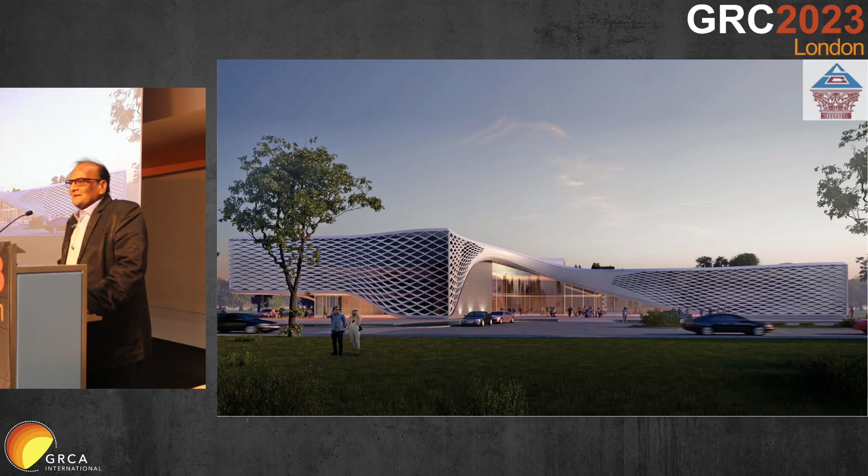Today I'm going to present a few of our intricate designs, intricate facades, which we are carrying out in India.

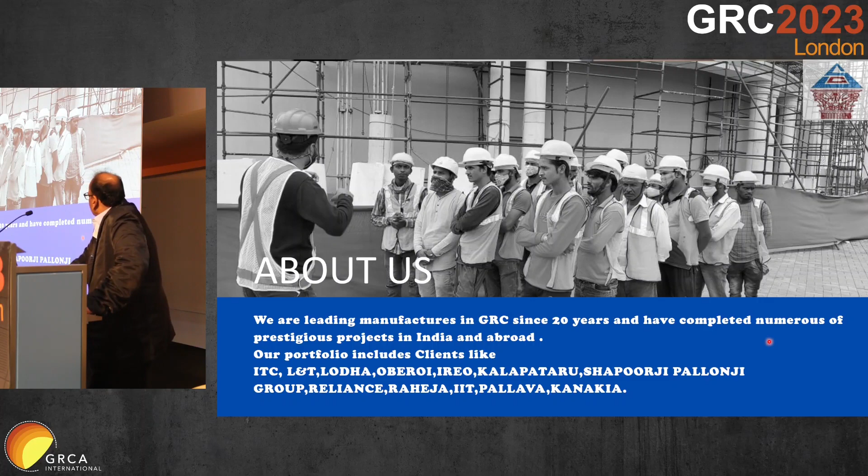Basically, this is our team's work, carried out onto the sites as well as our factory, following all sort of safety rules and regulations, which is most needed over there.

It's at the Jio World Center in Mumbai, a place called BKC, where we had lighted screens right from the first floor to the 7th floor. It has got 6 screens, width of around 5 meters, and height around 28 to 30 meters, different sizes, which has got inner coves to get the lighting inside.

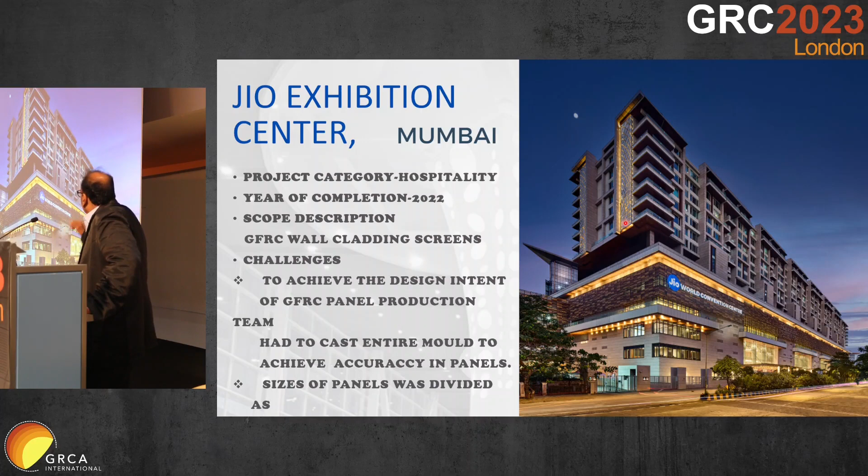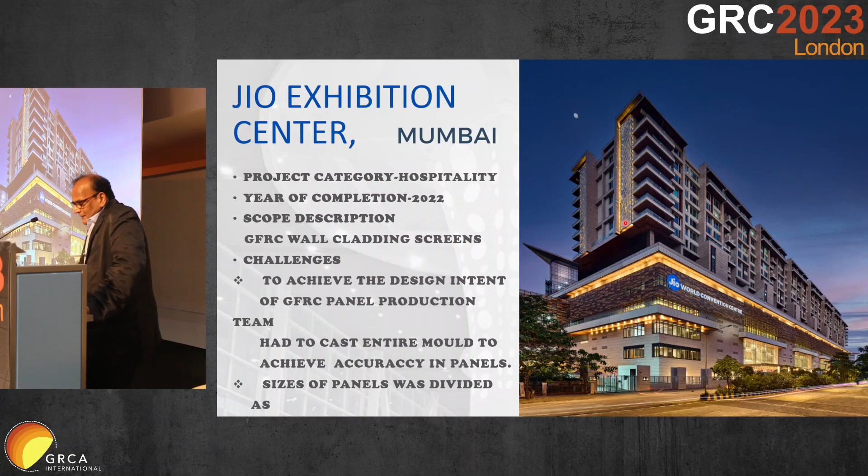So we got that done into the molds. It was very tricky and very expensive, so to avoid that, these are the details of the mold sizes, wherein all these are different shapes. If you see, these designs are going the other way around, left side and right side. So for only 6 total numbers, we had to prepare somewhat around 2 full molds over there to replicate that, and it was very expensive. The area was not that much.

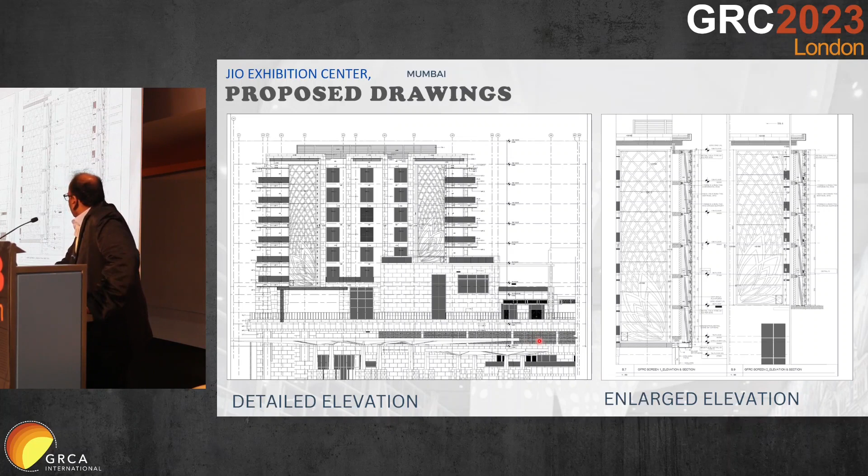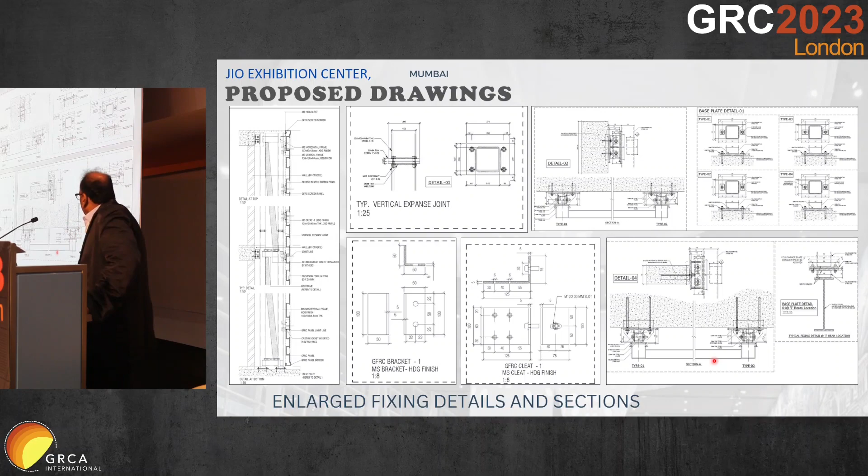These are the detail fixing, all done onto the steel framing work on top, as well as the provision for LED connections through all the design parts over there. These are kept around 1 meter away from the back wall.

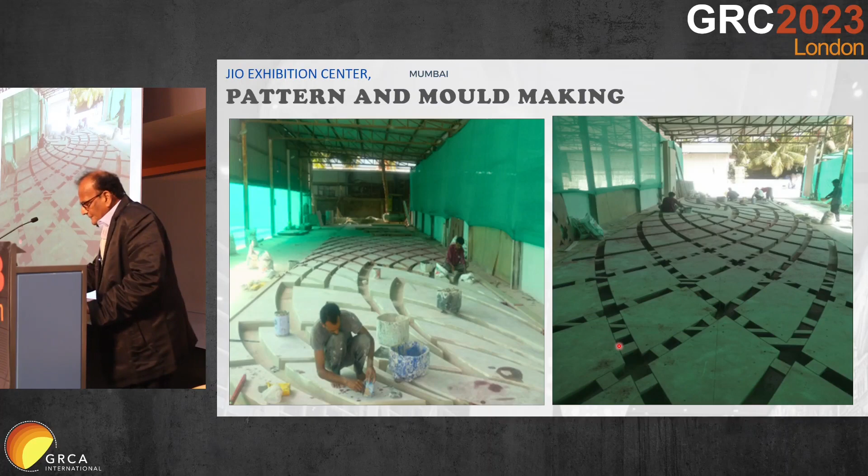This is the ultimate work that has been done. LED has been provided inside the coves over there, with individual coves. You can see the connecting lighting between the 2 lines, and these are the sizes of the designs.

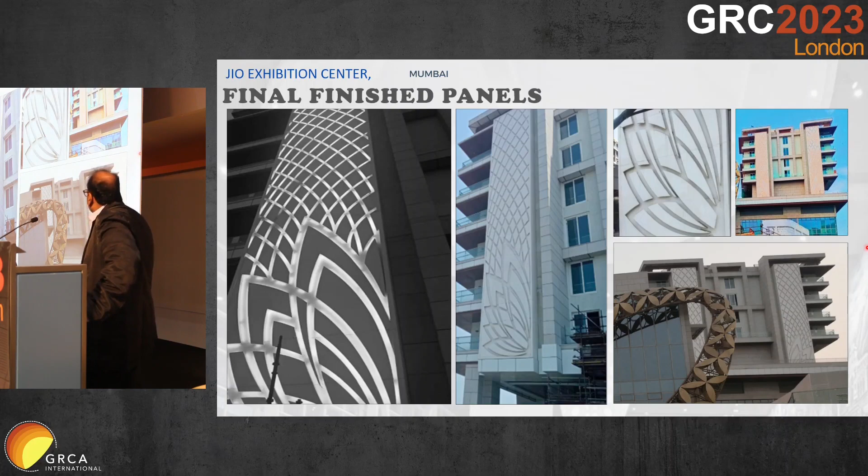This will be around daylight over there in detail. So like that, these are all the 4 elevations. There are only 6 screens, these shapes over there.

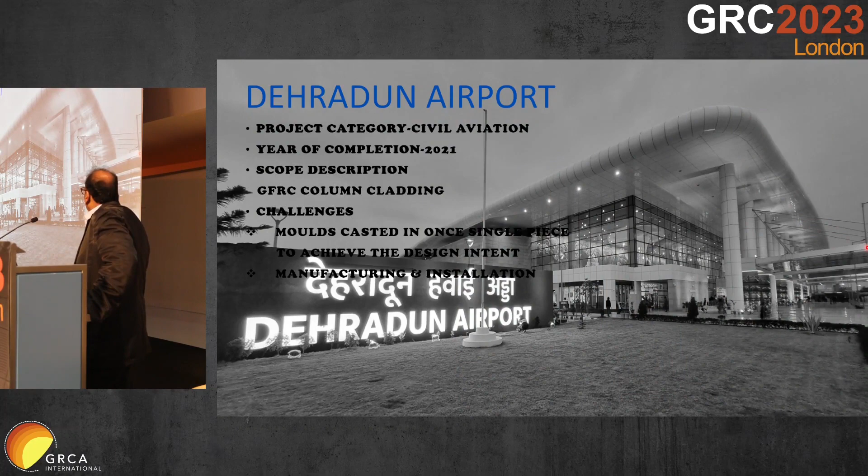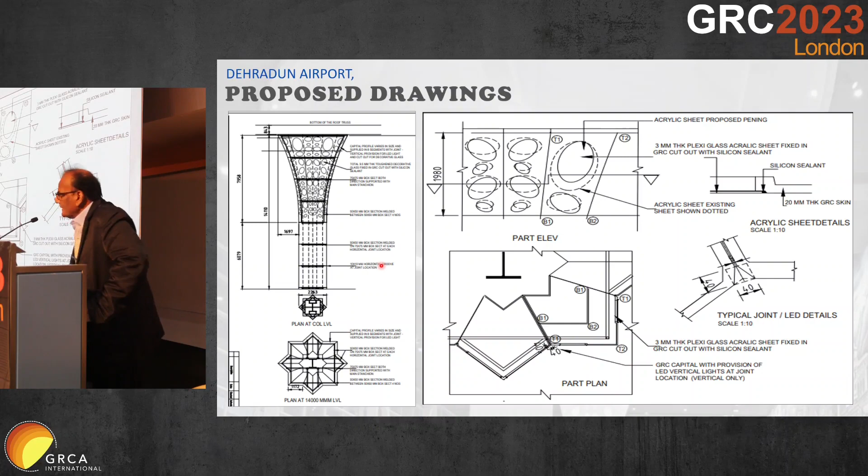And this lighting, these are the molds we had done in the part mold, which has an 8 repetition. There are around 14 columns inside, these are all the internal columns there.

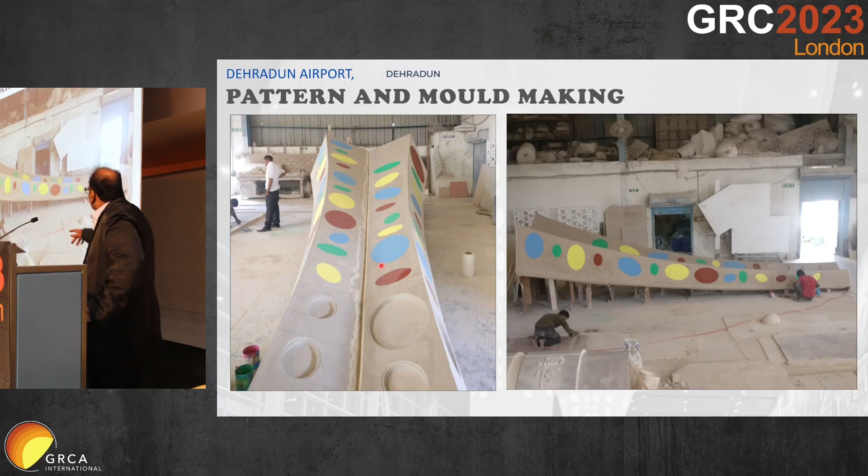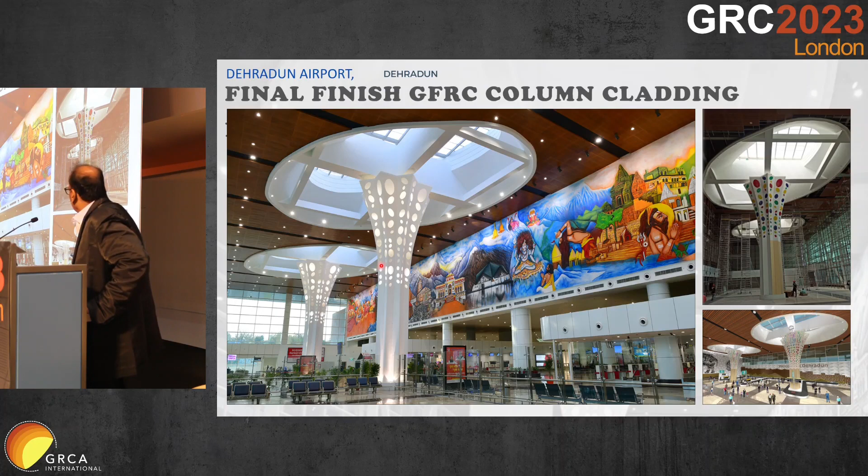These are the final photos of this finished work. The top capitals are illuminated with LEDs, as well as the bottom base, which was also illuminated. So all the hidden lighting has been done over there.

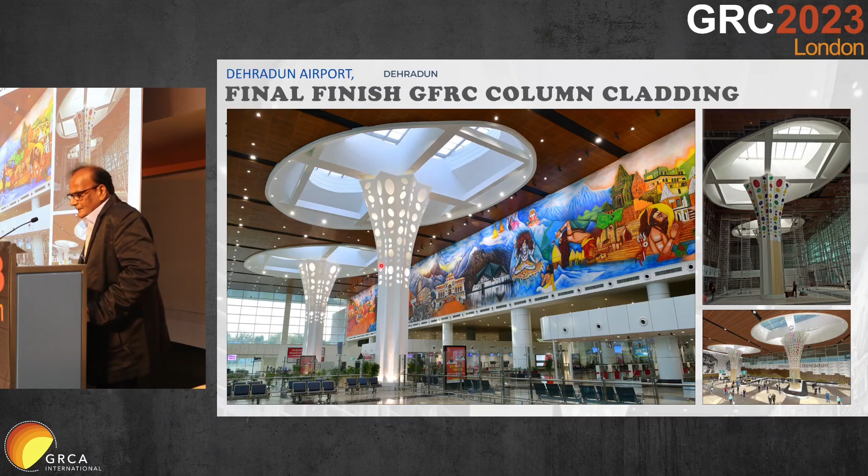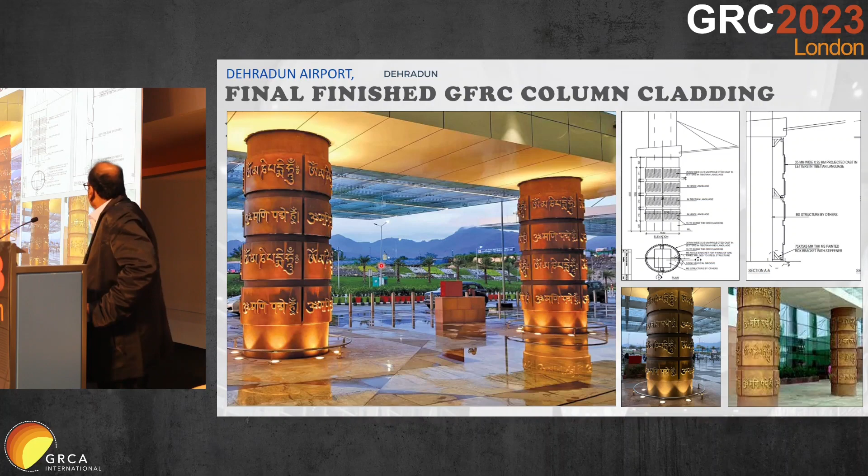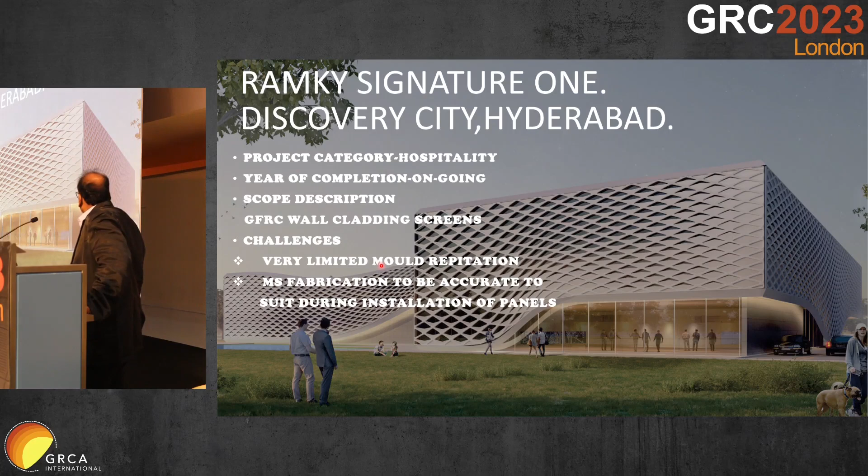There is another project ongoing at Hyderabad, for the clubhouse. It's a 3D elevation, very intricate, and very difficult to get the molds done. The work is going on.

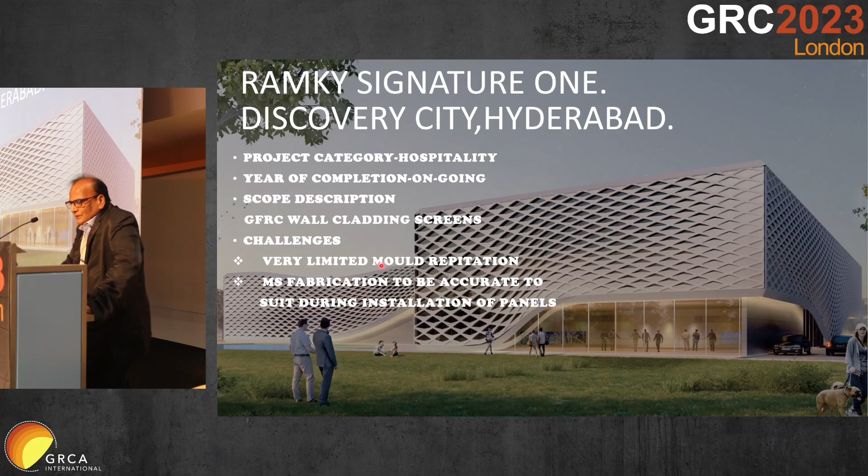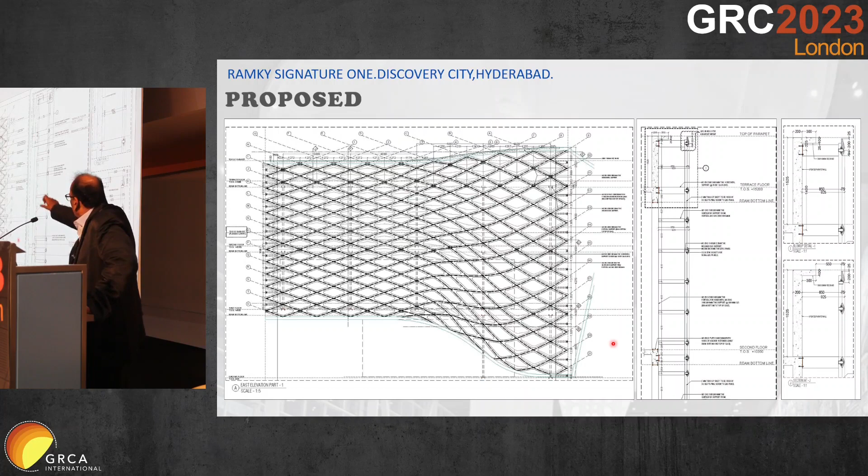These are the drawings that have been prepared. If you see these models, they are narrowing as the flow goes, and increasing as it goes down, as well as turning on the top and bottom with a curved shape.

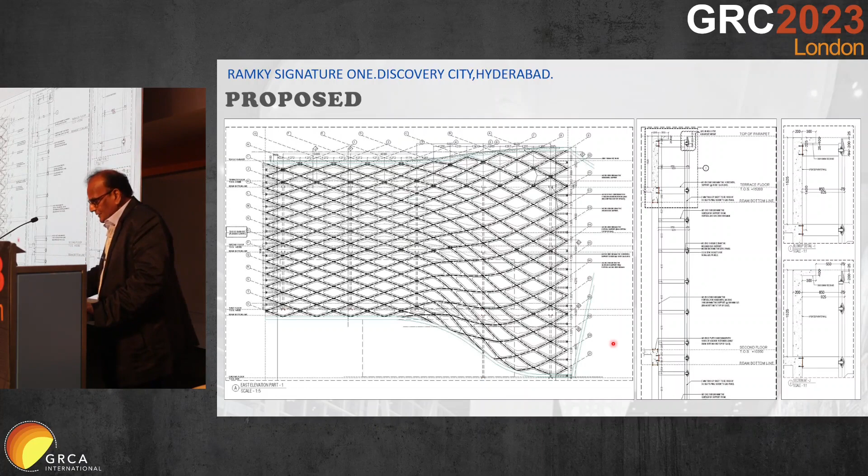These are the basic patterns, and this is one type of pattern. There were around 1,300 patterns like that, in different shapes, and these are supported with a structural framework inside, which is concealed.

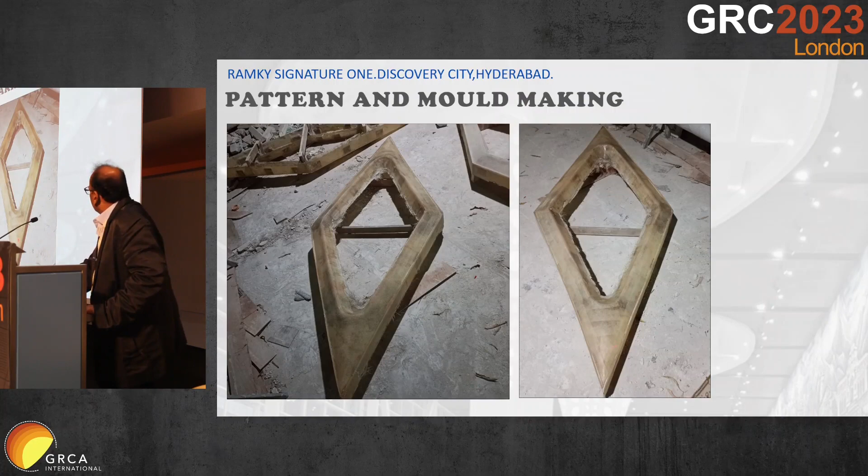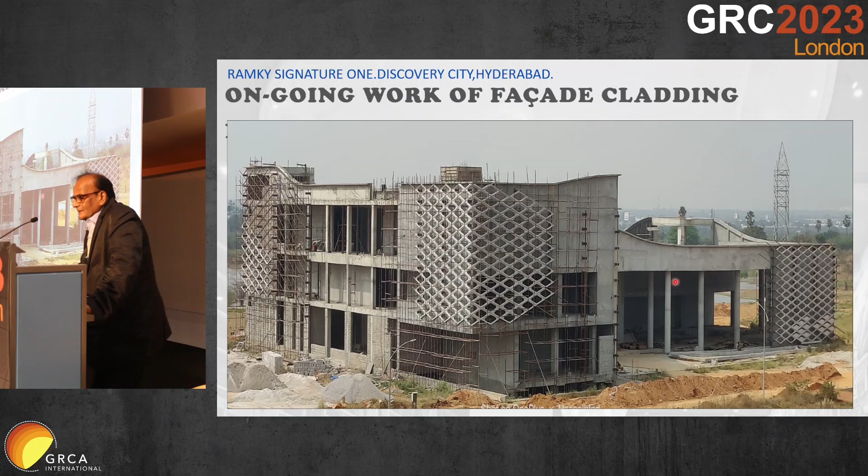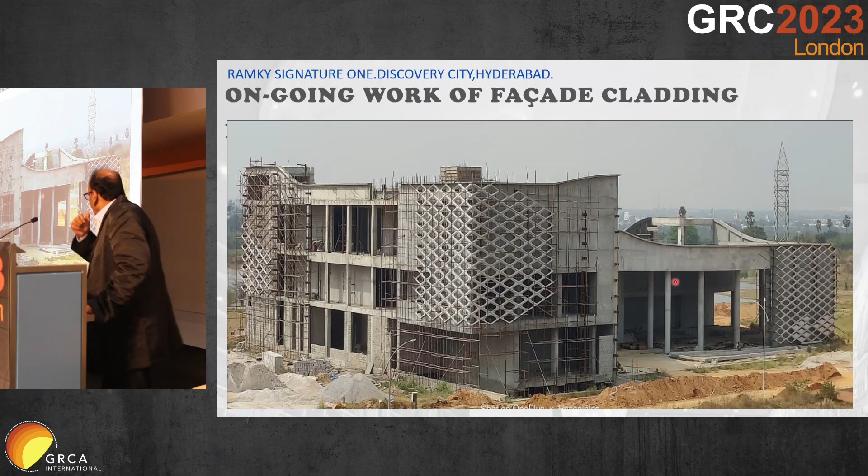These are the ongoing projects we are doing there. The screen is moving like that, and it is turning inside, going up to the ceiling part as well. This is very challenging for the designing part, because the architect and consultant were particular about the wind pressure, seismic forces, and strength. Because when it goes to the ceiling part, apart from those two forces, there is gravitational force also acting over there, so considering that, the design was done on a STAAD model.

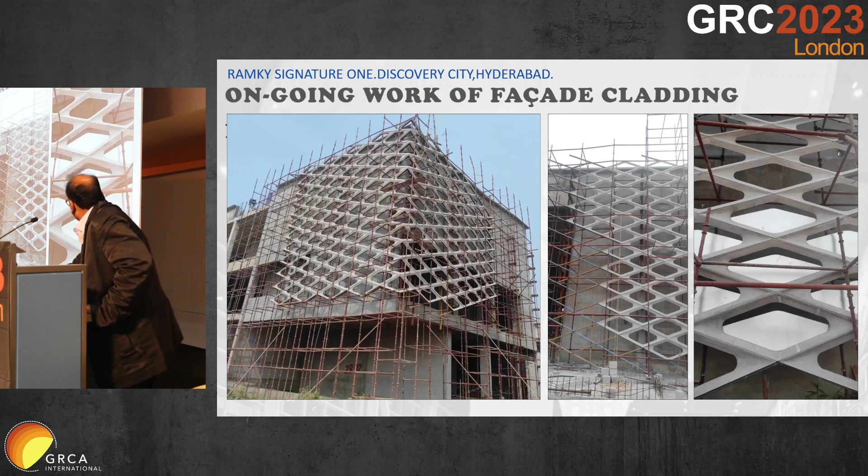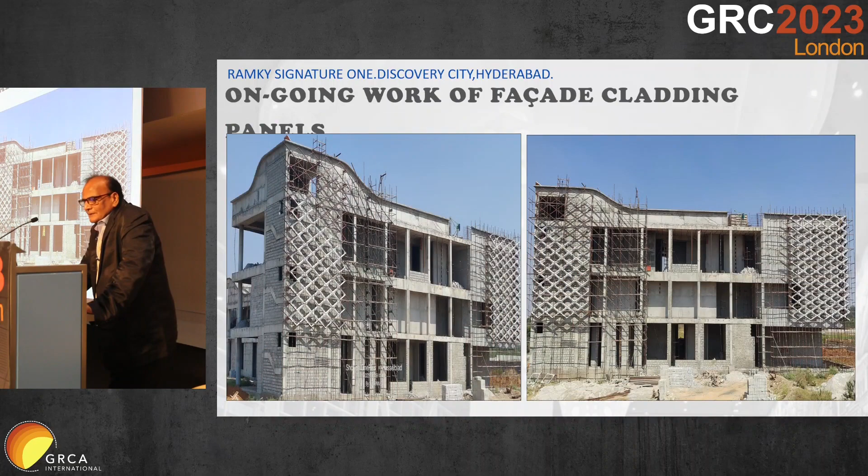This is the detailing you see at the joint line over there. Again, the corners - other two corner elevations are there.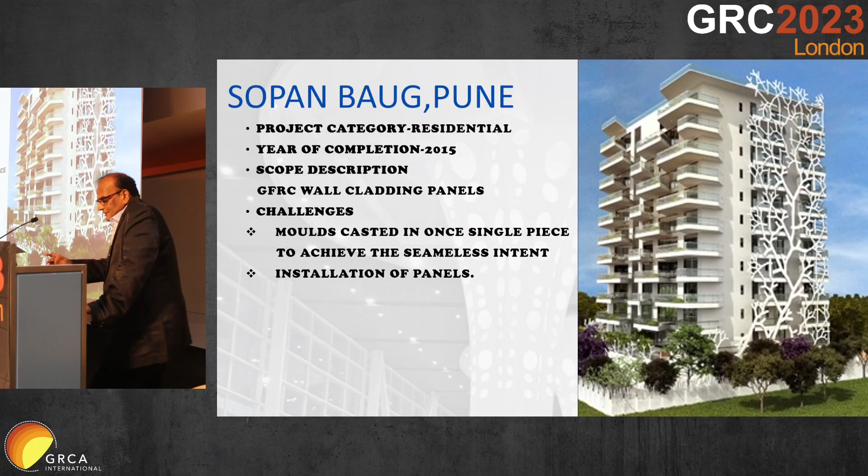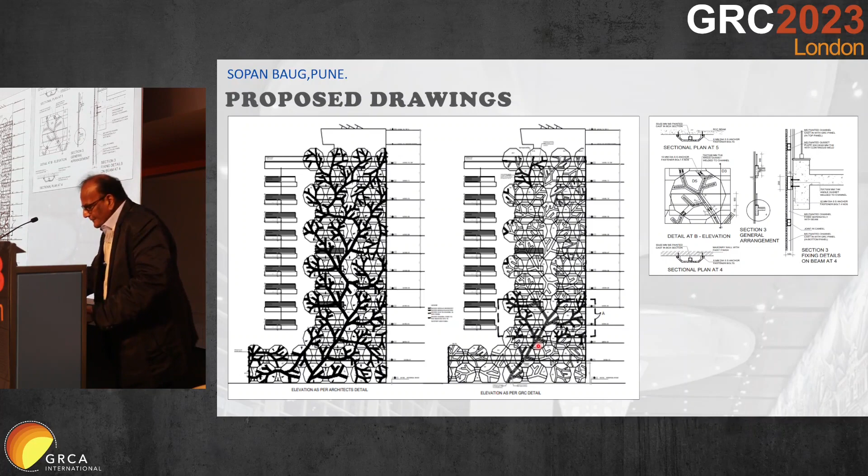This is the facade elevation, where it is branching from floor to floor, like in a balcony area. The client was a bit concerned about the strength part, because it's an open balcony, though they have got the glazing part over there. Still he was not comfortable about how it would sustain.

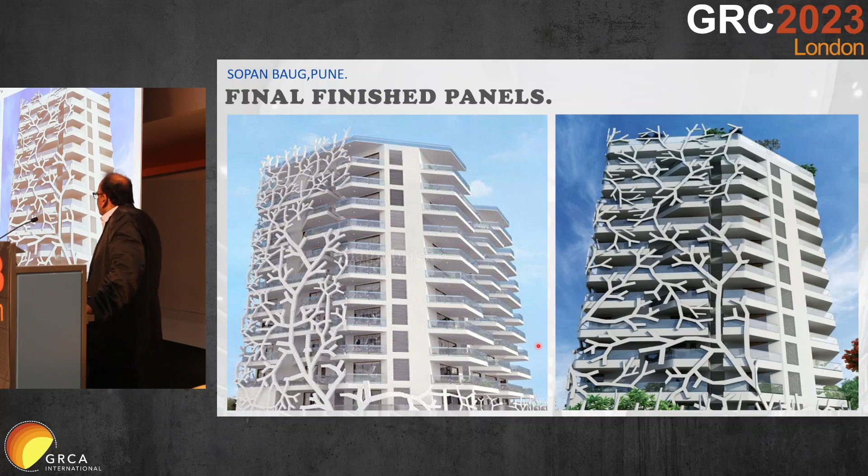So we had done the impact test on site after installation, as per the drop testing method, which is around 15 kg and 30 kg at a distance of 1 meter and 1.5 meter, from a height of around 1 and 1.2 meters. We did the testing at a few balconies and we passed there.

This is that elevation, where you can see the fins, which are the branches spanning between the balcony's open area.

Now one ongoing project is the data center at Chennai, where the architect had the concept of a parametric facade, where you can see the facade with blank patterns moving in a certain pattern. There are generator stations and this is the data center itself. These patterns go from the front elevation to the side elevation with a certain flow.

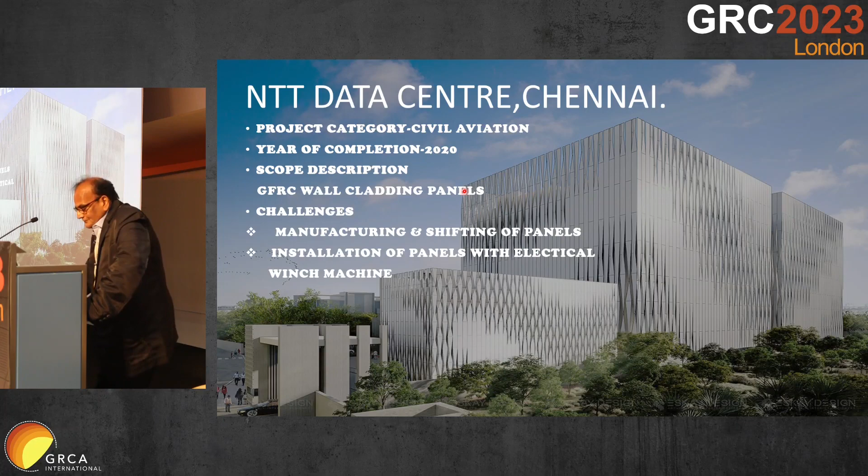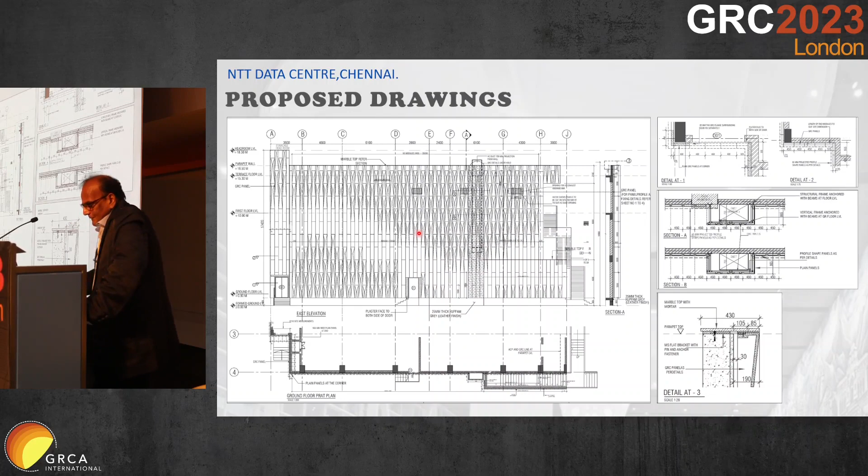These are the individual elevations. We numbered certain similar types of patterns, and according to that, the location has been provided at certain places to create that flow of the GRC.

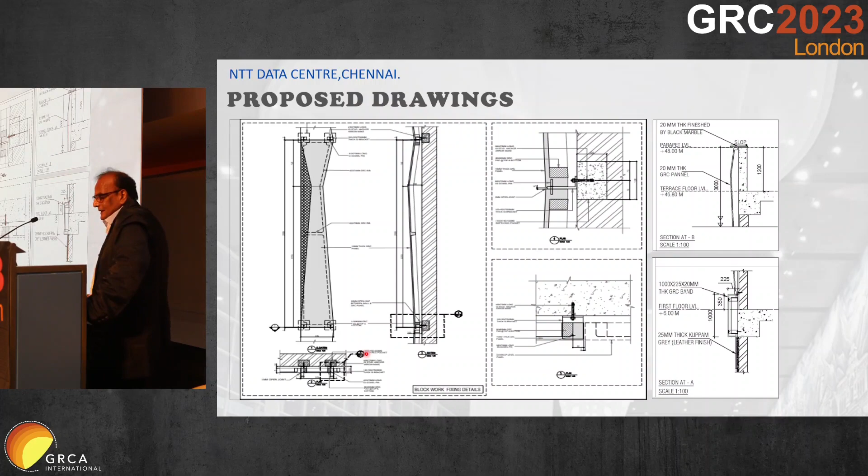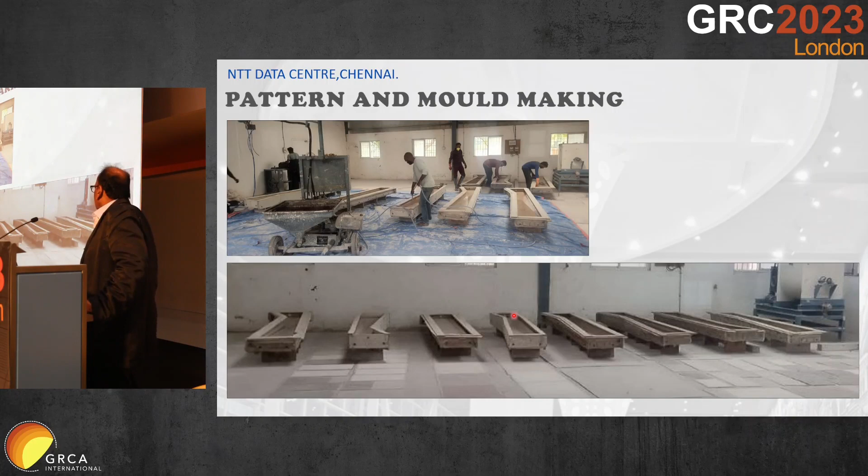These are the molds which we made on site. We had a mini plant at Chennai so the work could be done faster, because it had to be completed within 3 months. We started in February, and by June mid we should be able to complete it.

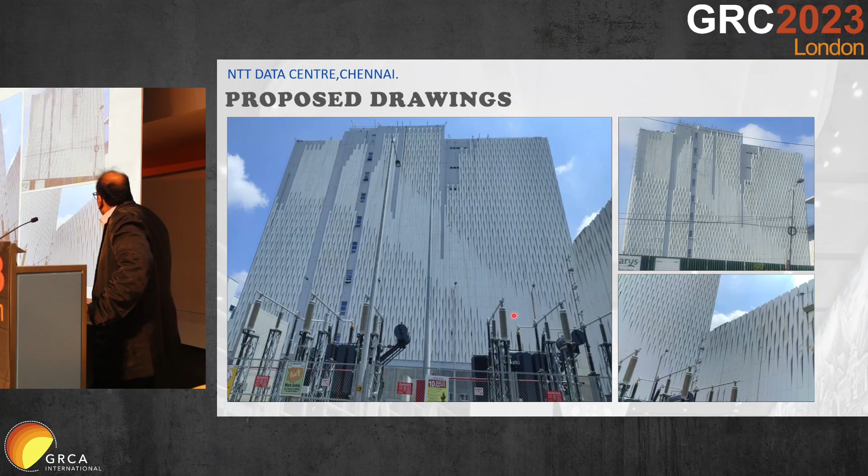This photo was taken one month back while I was preparing the presentation. Now this elevation has been done. This part and the window parts were kept open, but now it has been closed. All these elevations look really great, and the architect was very happy about the concept he thought of.

The difficulty here was how to place it, so we kept 2-3 bigger drawings, numbering each and every element. All the elements coming from the factory were numbered on the back side, so everything had to be sorted out and go along with the drawings and the flow. Hats off to my team on site, who did a great job.

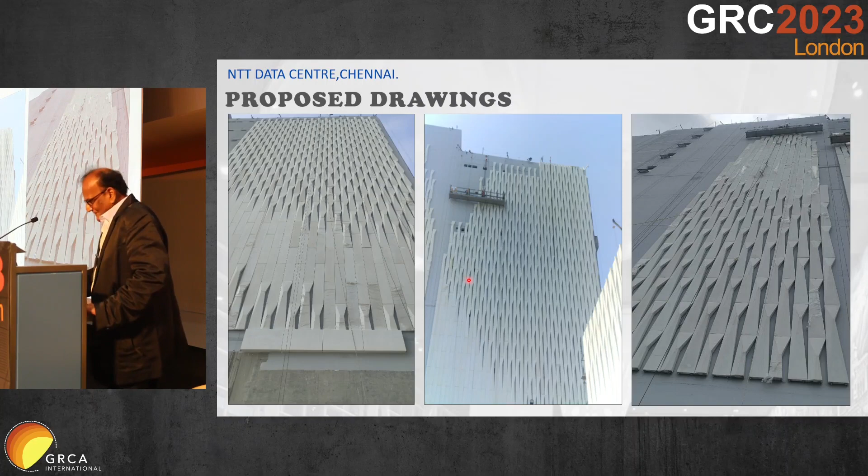Other miscellaneous projects we have done are small projects, but still with critical parts.

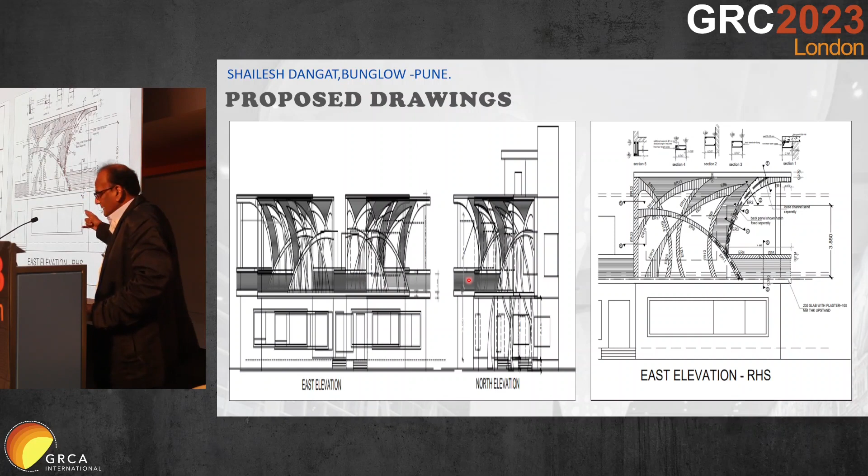There was a huge bungalow at Pune, where the owner wanted a parametric elevation on the entire balconies, all in GRC. He didn't want concrete, because concrete is very difficult to do. So after doing the design, the structural part, and giving them STAAD format calculations, we designed this structure. Again, we tested it with impact testing on site to satisfy the owner.

So this is the structure, with support reactors and all I-sections and C-channels ranging across. Somewhere on top you see hanging cantilevers without any end support. These are total cantilevers in some places. Even this one is hanging out there - it's a cantilever balcony, but the bottom is hanging.

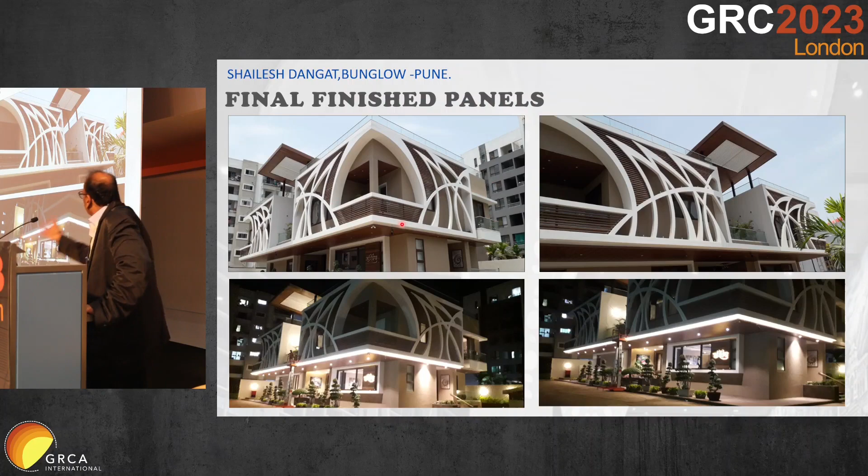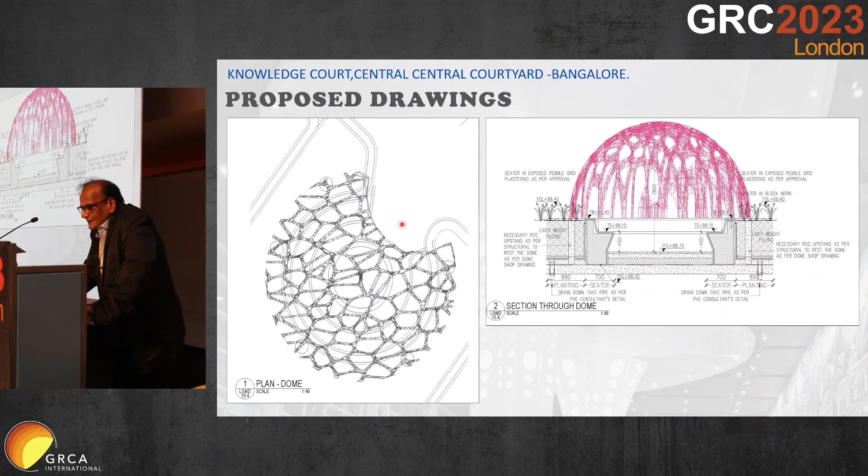One more dome project we did was at Bangalore for the Prestige Group. These are all the screen domes with a sitting arrangement at the bottom, which was around 3 meters in side width.

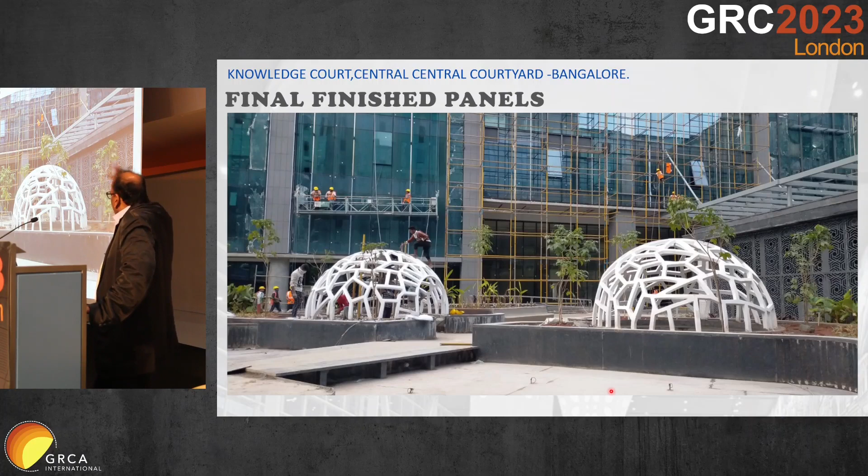This was done in one piece, individually boxed at 6 inches and fixed with finish on both sides. These are screwed down, and everything is welded at our factory. We did the entire mold at our factory, then lifted it, called trailers to shift it to the Bangalore site, and it was lifted by crane from the factory and placed.

This dome has lighting inside all the ribs.

These are the night views, where you can see the lights at the bottoms.

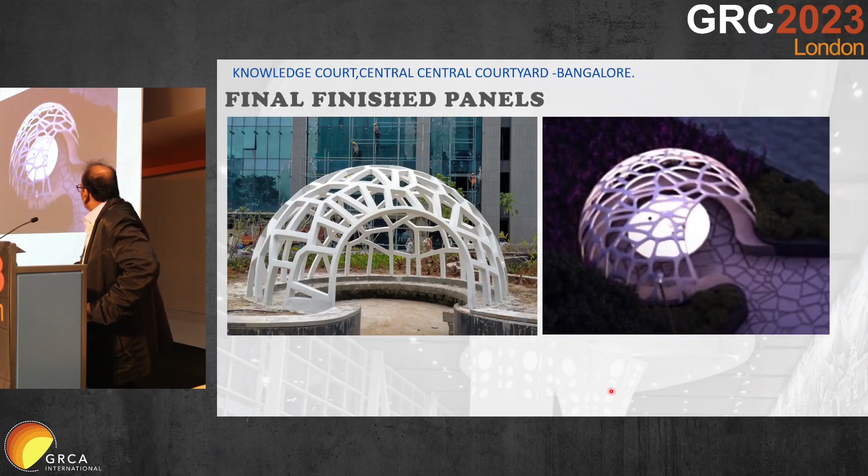I think last year we got appreciated with an entrepreneur award for this.